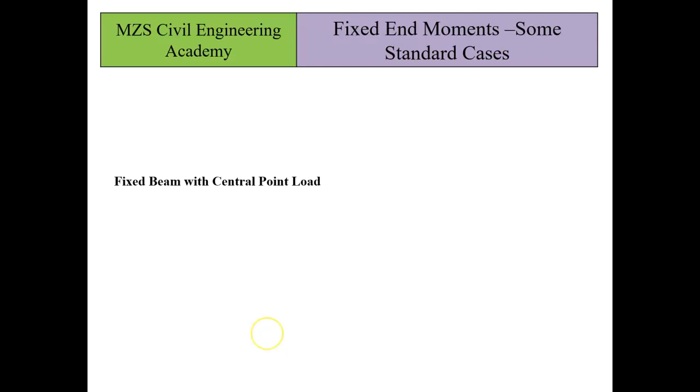Welcome to our lecture series on slope deflection method. In this particular session, we will be discussing some standard cases of fixed beam. Already we have gone through the derivation of these fixed end moments for the beams. So let us say first case: fixed beam with a central point load, where the load is provided at the mid span of the beam. A and B ends are fixed supports. That's why the beam will be having a hogging moment. The moment at A will be anti-clockwise and moment at B will be clockwise.

The moment at A will be equal to minus WL by 8, where I'm going to write it as MF A to B. F stands for fixed, and A to B stands for the joint where I am going to measure the moment and the direction I am going to move. So I am looking from A towards B. That's why I am writing it as A to B. Hope you will remember this one for the other cases. I will not repeat this for further cases. The F B to A means I am at joint B and looking towards A. The moment will be positive because we have considered clockwise as positive: WL by 8.

Now the second case is fixed beam with eccentric load. Here the load is placed at an eccentric distance. Let us say it is at a distance A from the left hand support and B from the right hand support. In this case, moment at the end A, MF AB, will be equal to minus W A B square by L square. We can remember this with a relation: it will be one times the near end and square for the far end, divided by span square.

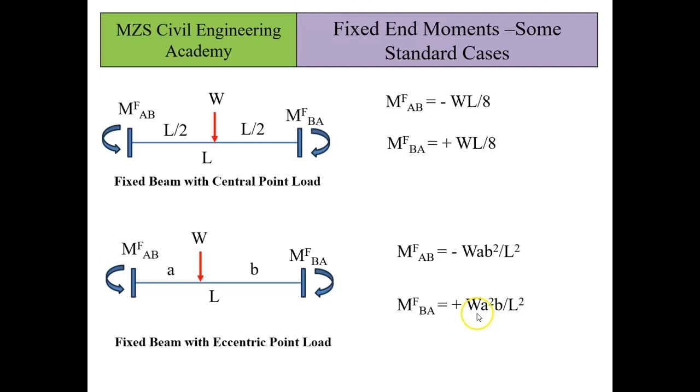In the similar fashion, if I write B to A, we can write it as W A square B divided by L square. Now A is the far end, that's why A square will be there, and the near end is B, that's why B will be in a single multiple. So we can write it as W A square B by L square.

Now let's move to the next case. It is a fixed beam with uniformly distributed load. Here the load is uniformly distributed over the entire span. Let's say its magnitude is W kilonewton per meter. Since the uniform distribution is there, the moment at both ends will be of similar magnitude. We can write MF A to B equals minus WL square by 12. MF B to A equals plus WL square by 12.

Now we'll go towards a case: fixed beam with a uniformly varying load. Here the load is going to have a maximum and minimum value. At one end it will have a minimum value, at the other end it will have a maximum value, or we can say it will have a gradually increasing load from one end to the other end. That's why it is named a uniformly varying load. In such a case, moment at the end A will be given by minus WL square by 30 and moment at the end B will be given by plus WL square by 20.

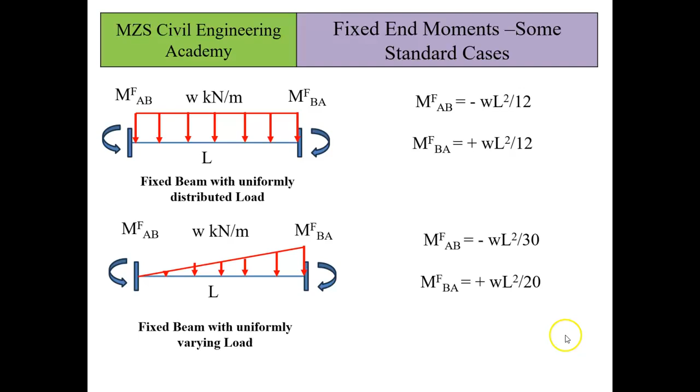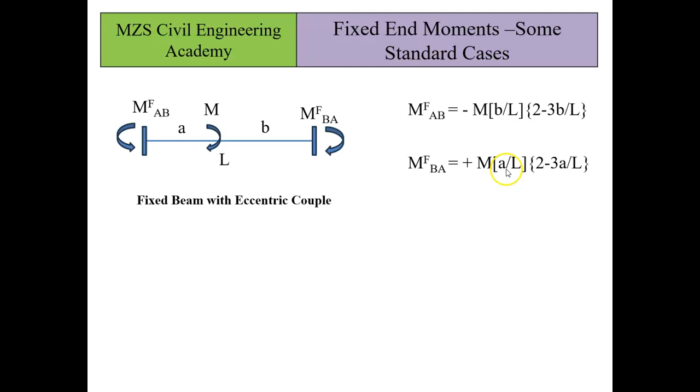Now let's go towards the next case where the beam is subjected to an eccentric couple. The couple is placed at an eccentric distance over the span. Due to this, the moment generated at the end A will be equal to minus MB by L into bracket 2 minus 3B by L. Similarly, the moment at B will be given by MA by L into bracket 2 minus 3A by L. If we relate here, when we consider joint A, the multiplier in the bracket is B. Whereas if I consider joint B, the multiplier in the bracket is A. This we have to remember to recite the formula.

Please remember these formulas because we need to apply them directly while solving numericals on fixed beams using slope deflection method.